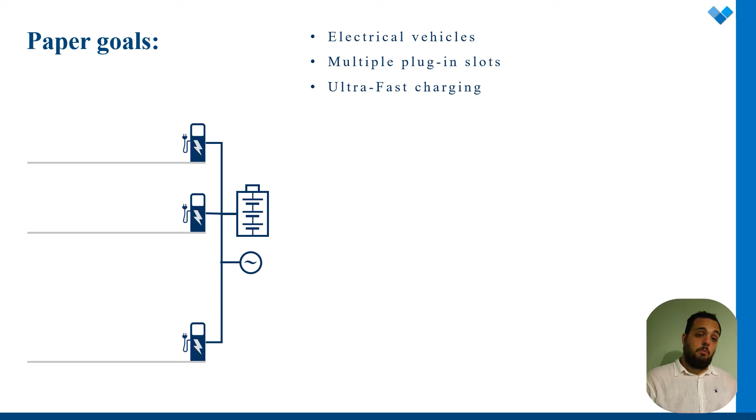Enjoy the video. The topic of my paper is ultra-fast charging for electrical vehicles. The charging station in my university department has multiple plug-in slots to charge up to 2 vehicles at the same time. The paper's goal is showing how to plan the charge strategy for contemporary charging vehicles, ensuring an appropriate balance of energy and power between sources and loads.

The charging profile planning for individual vehicles is related to the scheduling problem that involves all vehicles in the station. The scheduling problem can be traced back to an optimization problem, and its solution influences the choice of charging profile planning. This cycle of operation is repeated for each vehicle.

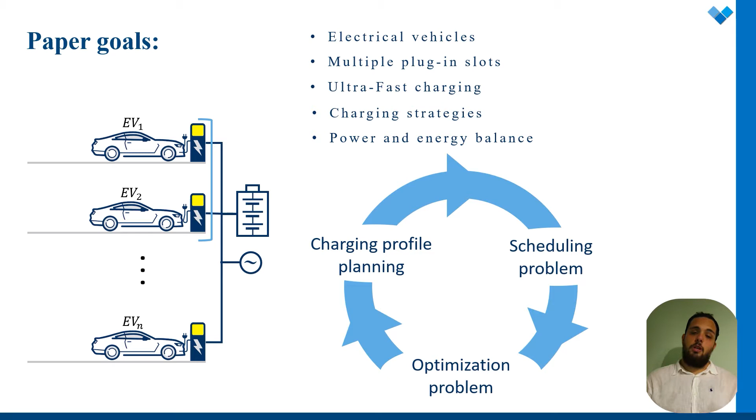The paper and this presentation are composed of an overview of the context and problem description, the selection of a suitable scheduling algorithm under certain conditions, the transition from the scheduling problem to the optimization problem for one or more vehicles, and finally the results and validation of solutions are presented.

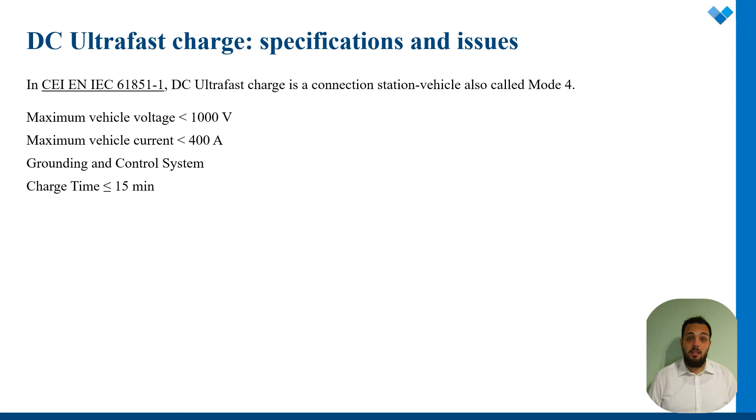The standard proposes a definition of ultra-fast charge, calling it mode 4 charge. The maximum values of voltage and current are prescribed, but also the properties that characterize the charge mode are indicated. The value of charge time has to be read as the time to bring the battery of the vehicle from 20 to 80%. The constant current charge at maximum value is possible only in this state of charge area.

All batteries from now on are charged and discharged in this considered area. The structure I'm going to present is a typical one in ultra-fast charging stations.

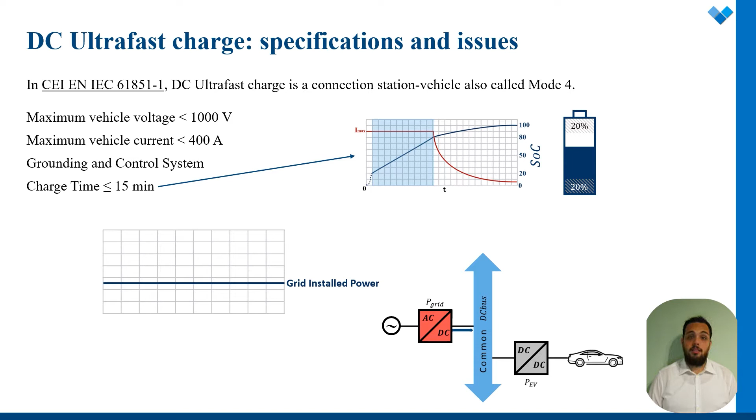There is a grid which can provide its maximum installed power. If the demanded power of the loads is less than the grid installed power, the grid can charge the vehicle alone. Since the demanded power can increase over the installed power, the charging stations are equipped with a storage system that helps the grid fulfill the demanded power.

More in detail, the structure I will refer to later on is that of the station in my department. A photovoltaic system on the AC side is also connected to the network. Several converters connect sources and loads.

An active front-end is connected to the network to keep voltage constant on the common bus. DC-DC converters allow direct control of power which flows to the vehicles. A bidirectional DC-DC converter then allows the network to work at maximum constant power and the battery storage system to make up for the load power peaks.

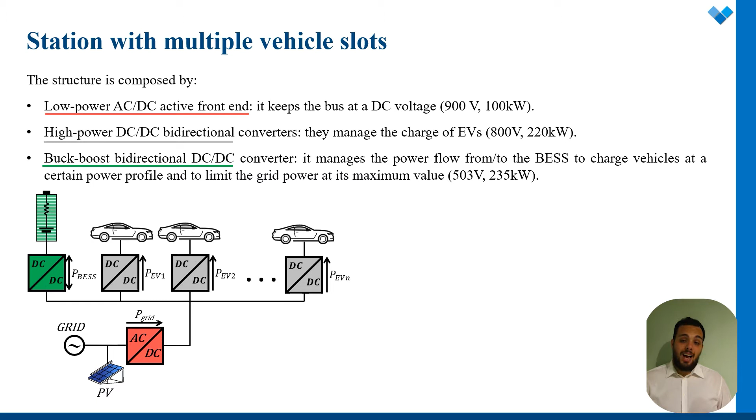The maximum power value of the network is set to 100 kilowatts because the station is designed for low voltage connections. The charge profiles depend on the arrival time of vehicles, their initial state of charge, and the state of charge of the storage system for each arrival time.

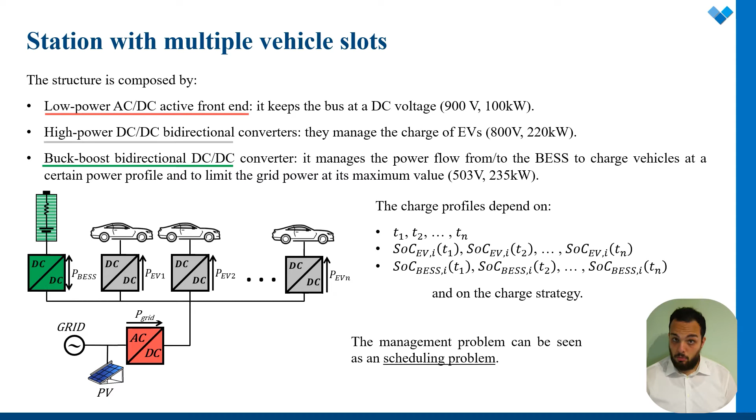The management problem can be seen as a scheduling problem. In order to choose the suitable scheduling algorithm for the scheduling problem, we are going to analyze the charging procedure.

The vehicle arrives at the station and provides its status information: state of charge, capacity of battery, and maximum value of power or current. The system processes this information together with the BESS status and the energy and power constraints, and results in the charging profile.

The customer receives the receipt with the charging profile and pays on the basis of charging time. A faster charge is a more expensive charge.

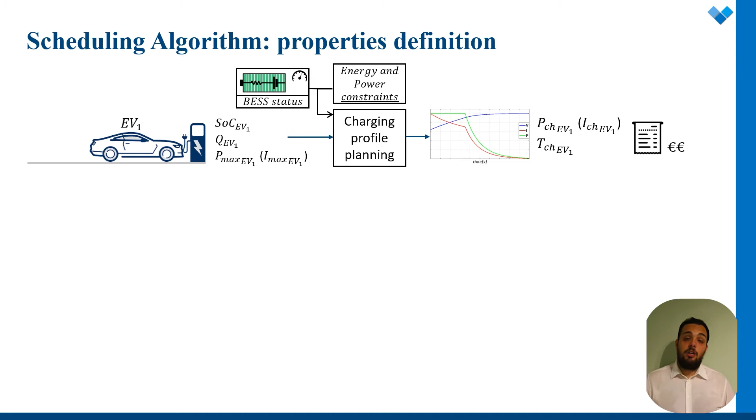The same procedure is applied to the second vehicle, but the energy and power constraints depend on the charging profile assigned to the first vehicle in this case. The choices on the first vehicle affect the charging profile planning for the second one, but not vice versa.

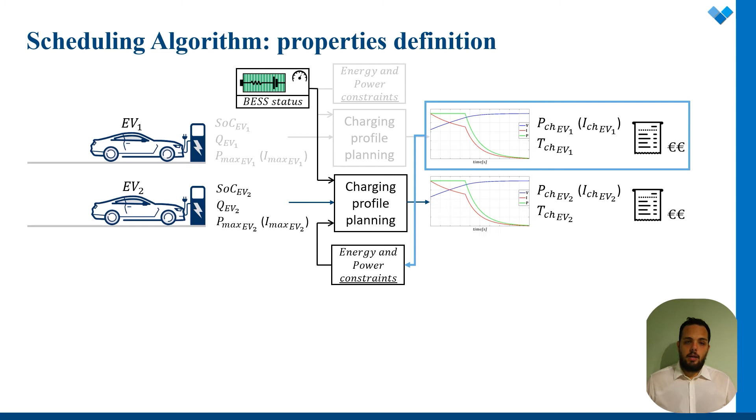This is because the first customer has already accepted the charging profile for his vehicle and has paid for it. For this reason, the planning for the second vehicle is more constrained, so the performance of the charge is less than that of the first vehicle.

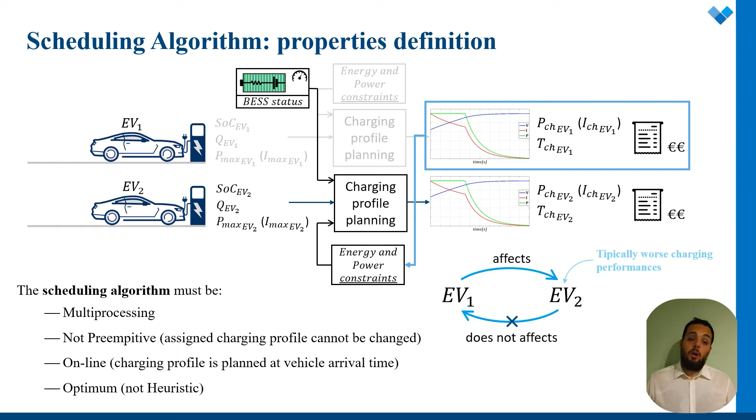The scheduling algorithm must be multiprocessing since there are multiple slots, non-preemptive because the performance assigned to the first vehicle cannot decrease in order to help the second one, online because there isn't a priori information about arrival times of vehicles, and optimal because no heuristics are used.

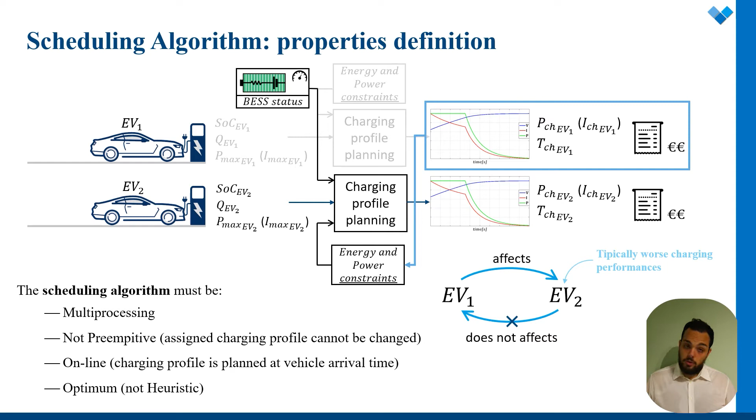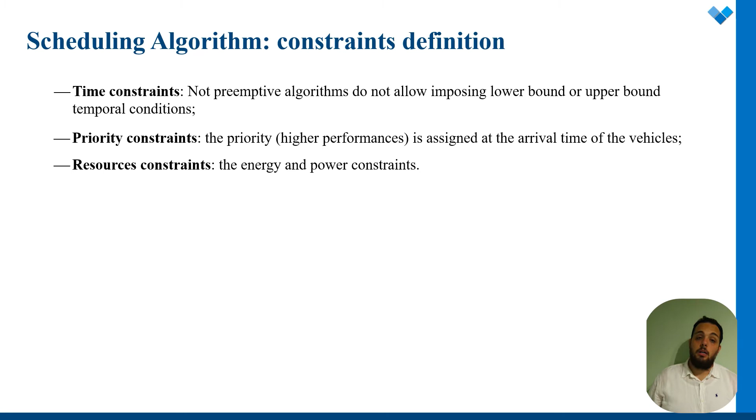The choice of a suitable scheduling algorithm also depends on the constraints of the problem. Priority is given to vehicles in the same order in which they arrive, because there isn't a provision on arrival times. There aren't time constraints due to the non-preemptive nature of the problem, and the resource constraints are physical constraints. The best candidate algorithm is first come, first served.

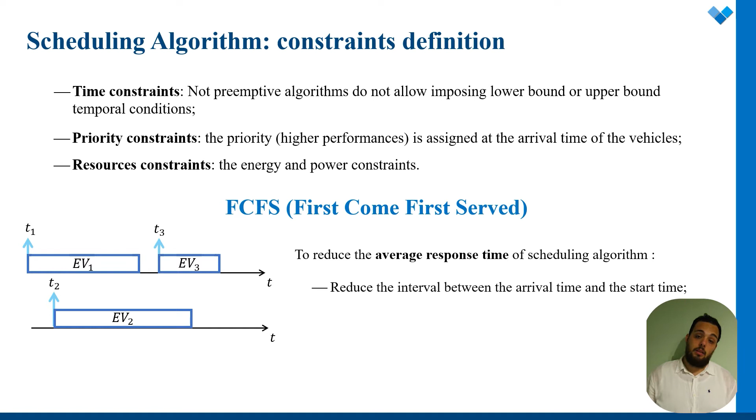A metric function can be used to evaluate the quality of the algorithm. In particular, the average response time can be reduced by reducing the interval time between arrival time and start time, but in the charging procedure this interval is already zero.

Increasing the number of charging slots could be a solution, but it can be useless because the charging performance depends on the resource constraints anyway. Relaxing the energy and power constraints is another option, but the solution is expensive and involves a consistent hardware change.

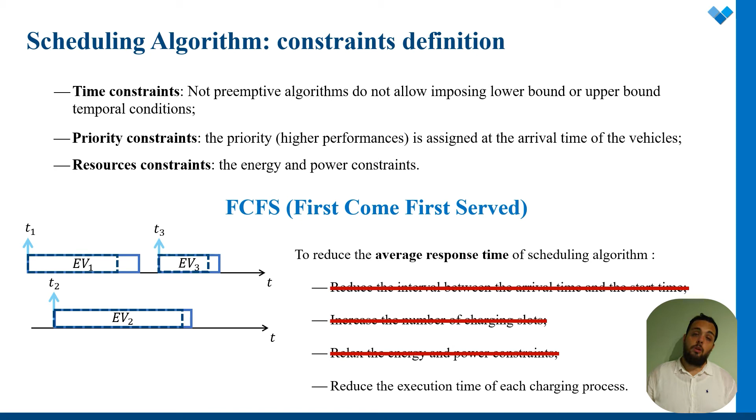As it appears, the reduction of execution time of each charging process is the best way to reduce the response time. The improvement of the scheduling algorithm is led back to an optimization problem whose solution suggests a charging constant profile and the maximum value of the power for a charge with imposed power.

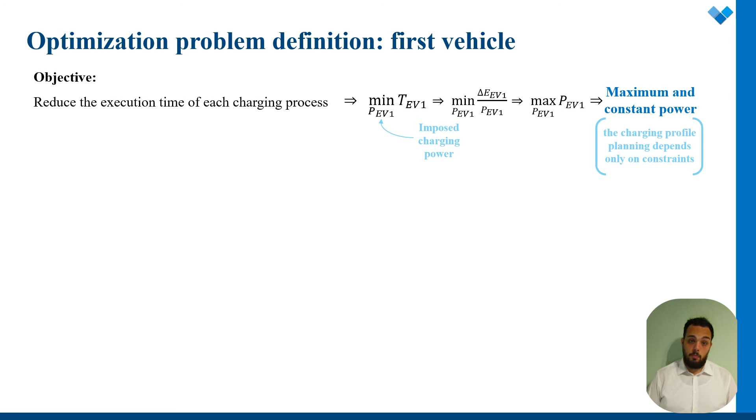For the first vehicle, the power constraints concern the maximum charge power on the vehicle side and the maximum values on the storage system and the grid, taking into account the efficiency.

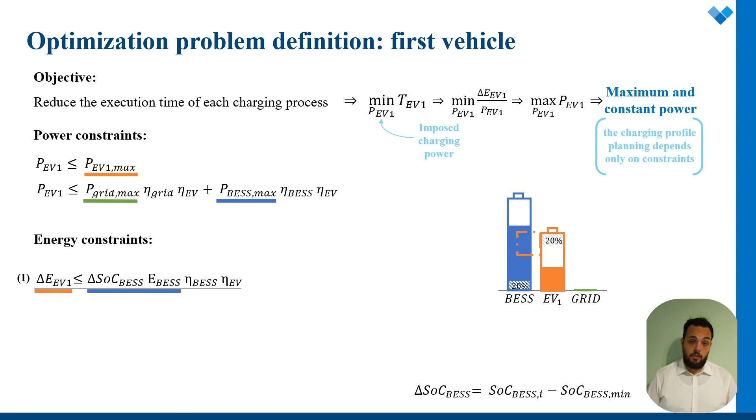If inequality 1 is verified, the energy required by the vehicle is entirely contained in the storage system, so the charging plan can be done without the energy constraint. The energy required by the vehicle is proportionally distributed between the storage system and the grid.

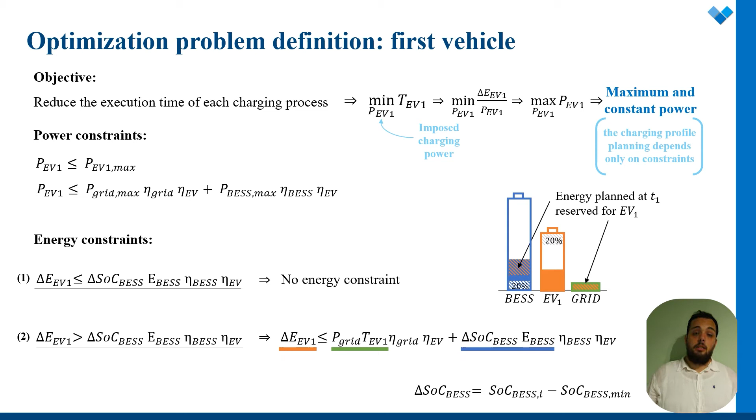If inequality 2 is verified, the energy constraint is imposed to balance the distribution of energy between the storage system and the grid. It should be noted that if inequality 2 is verified, the charge can still be carried out, but with lower performance.

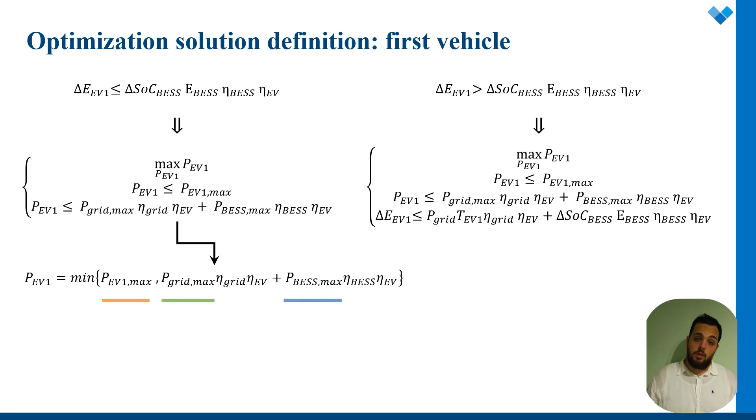Conditions 1 and 2 allow us to define two optimization problems with two solutions. In the first case, the charge power is chosen between two options. In the second case, there are three options.

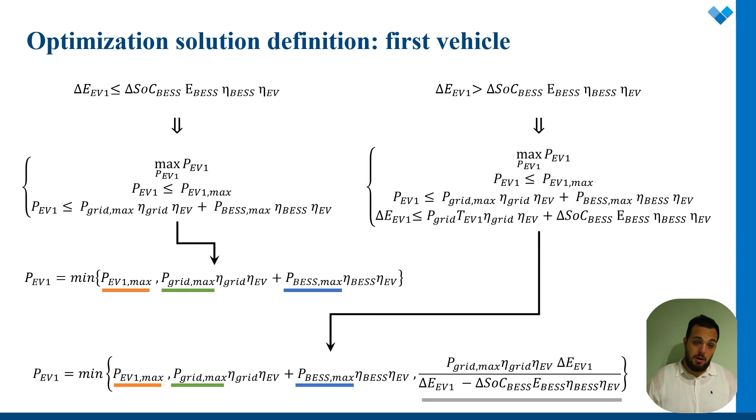In the second case, the presence of a third term doesn't mean that the power is equal to this term, but only that the choice is more bounded.

The optimization problem for the second vehicle is more complex than the previous one. On the basis of the arrival time of the second vehicle, three cases can occur. The charge, contemporary to the first vehicle, can be partial or complete.

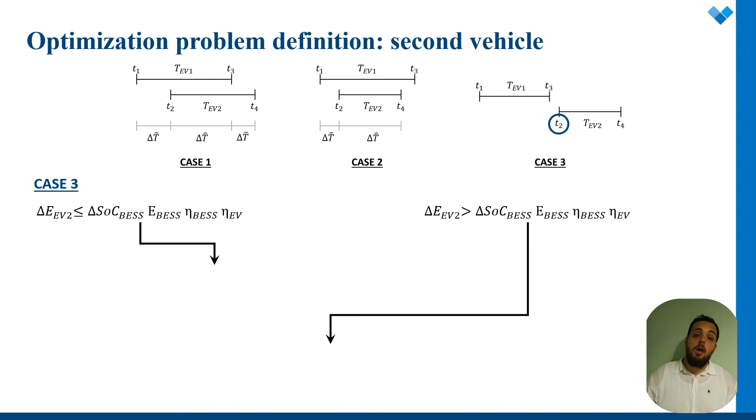The degenerate case is when the two vehicles are never contemporaneous. This case is solved as for the first vehicle.

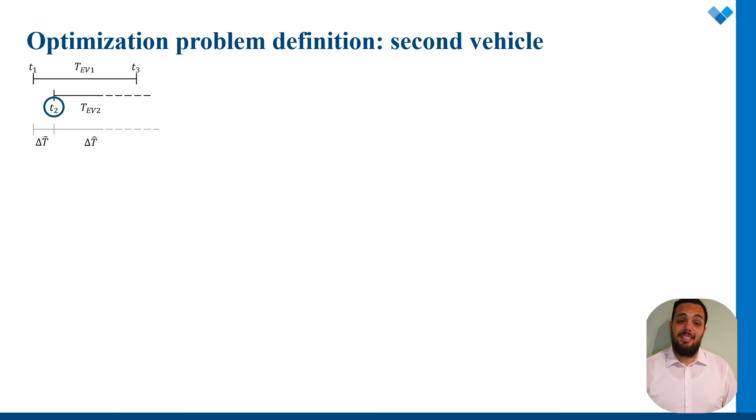If the second vehicle arrives at the station when the first vehicle is charging, case 1 cannot be easily distinguished from case 2. The objective function is the same as for the first vehicle, while the power constraints include both the power of the first vehicle and the power of the second one.

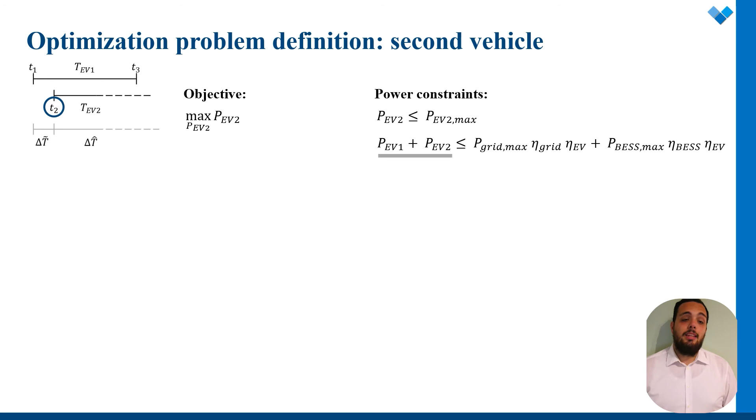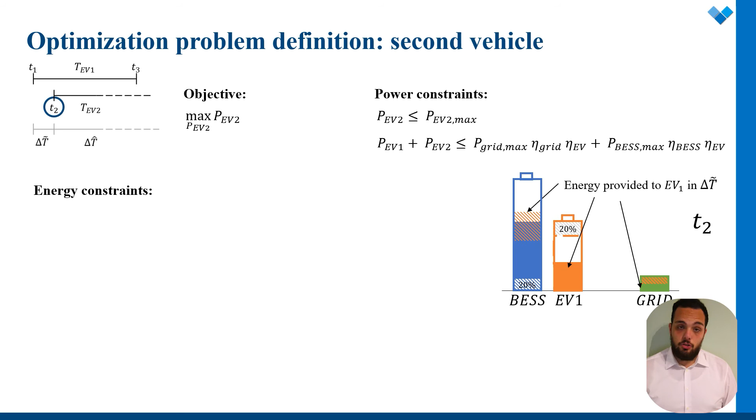The inclusion of the energy constraint depends on a condition. After the planning of the charging profile of the first vehicle at time t1, the energy from sources and load is exchanged at time t2. At this time, the second vehicle arrives.

If inequality 1 is verified, the energy required by the vehicle is less than the energy of the storage system at time t2 and the energy of the grid reserved for charging the first vehicle. Also, if inequality 1 is verified, the charge may fit both case 1 and case 2.

In case 2, the energy reserved for the second vehicle is provided entirely by the BESS. In case 1, the energy reserved for the second vehicle is split between the storage system and the grid. In both cases, the energy constraint is not necessary.

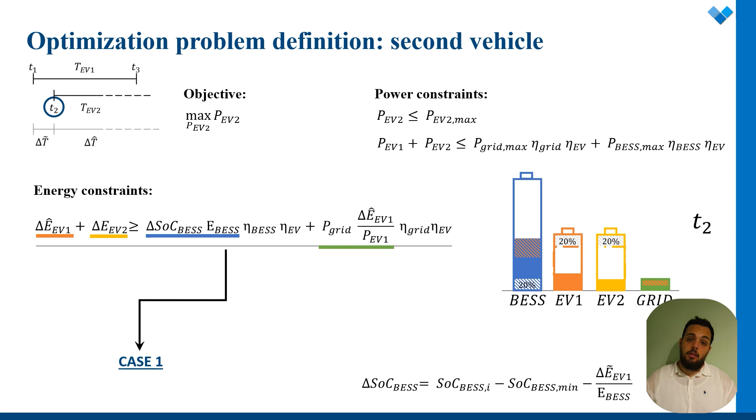On the contrary, if inequality 2 is verified, the energy constraint is mandatory. Condition 2 allows only case 1 to occur. It should be noted that if inequality 2 is verified, the charge can still be carried out, but with less performance.

Conditions 1 and 2 allow us to define two optimization problems with two solutions. These solutions are the charging powers of the second vehicle only in case 2, because in case 1 there is a time interval in which the second vehicle is alone in charge.

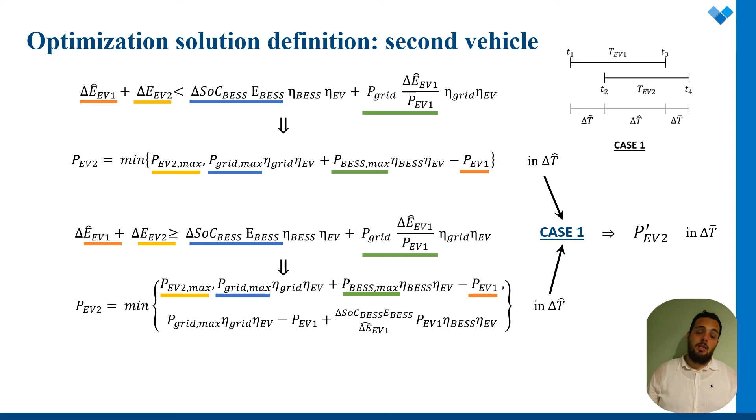In this final time interval, the power available by the station is higher than in the first part of the charge. In the absence of contemporaneous charges, the solution is the same as that formulated for the first vehicle.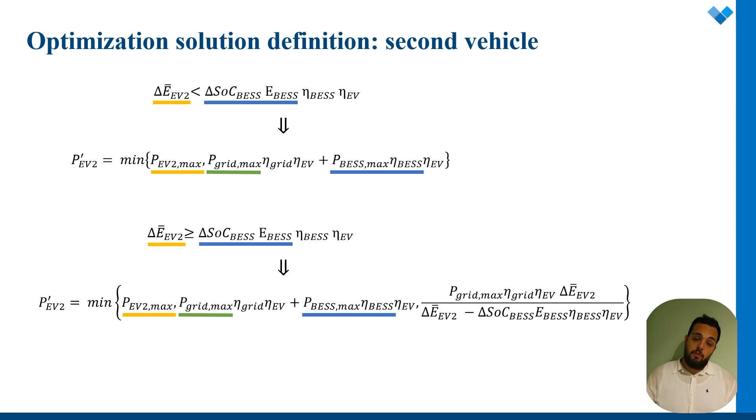The solution results confirm that the charging of two vehicles is available under different conditions. In case 2, for example, when the storage system is charged enough, the second vehicle can finish its charge before that of the first one.

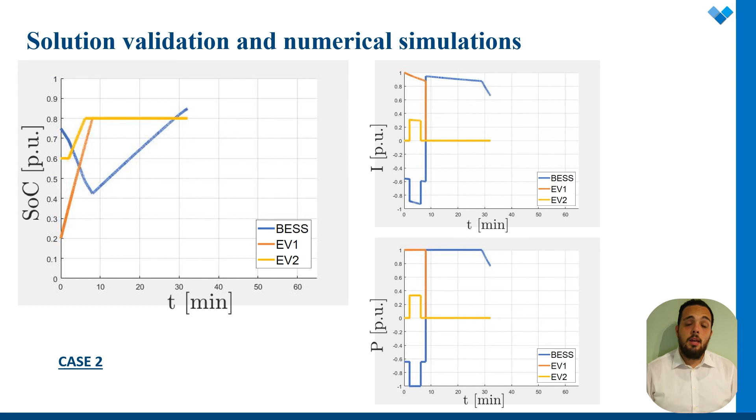In case 2, when the BESS is charged enough, the optimization problem can be solved without the energy constraint. In case 1, if the BESS is half charged, the second vehicle can be charged, but its charge couldn't fit into the typical charging time of an ultra-fast charge.

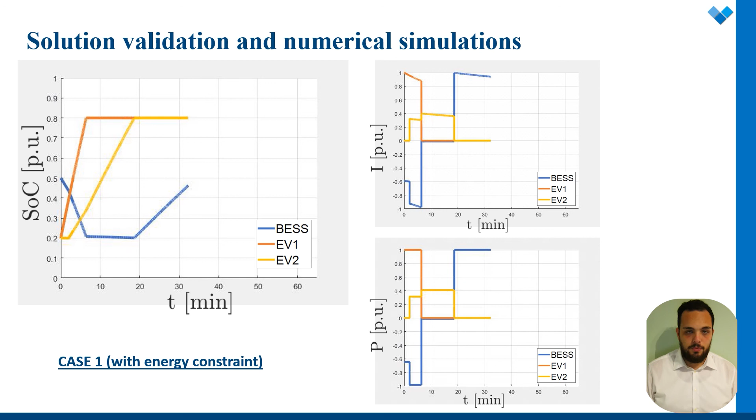The loss of performance in the last simulation can be solved with a different scheduling algorithm that can recognize preemption using a heuristic approach. Using the proposed scheduling algorithm, the loss of performance implies a subclassification of charge and a reduction of income for the charging supplier.